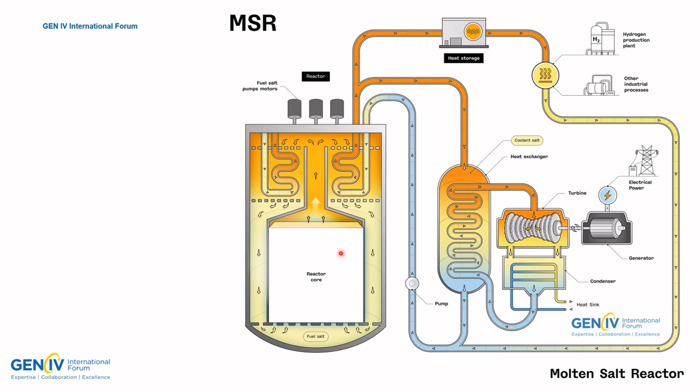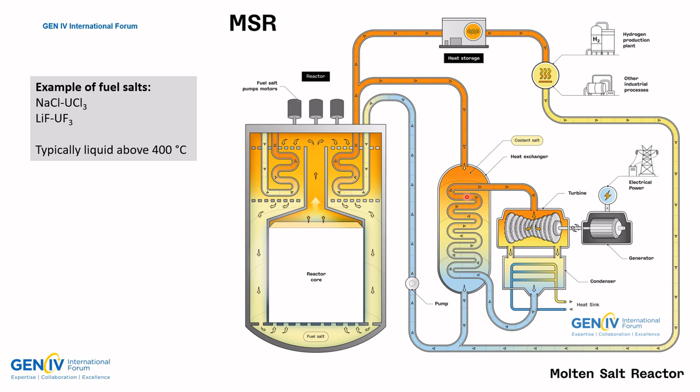My name is Mascaron. I'm a cyclist and a nuclear engineer, and I will pitch my Gen 4 PhD research carried out at CEA in France. I studied molten salt reactors, which are nuclear reactors with fuel in the form of a hot liquid, circulated from the core where fissions generate heat to heat exchangers. The heat is then carried by a coolant salt and used to generate electricity in a power conversion cycle.

This is the concept, but as with bicycles, we must figure out how to operate MSRs, a topic rarely covered in literature. In my PhD, I propose a methodology to define and assess strategies to control MSRs depending on their design. For instance, when to brake, how much, with what brake technology, and how do the answers to these questions depend on the bike design and on the road you follow.

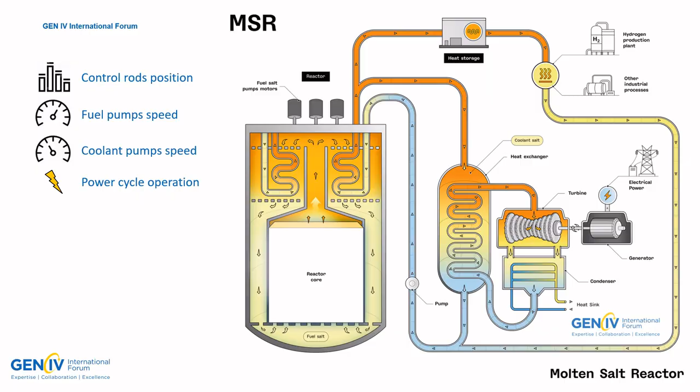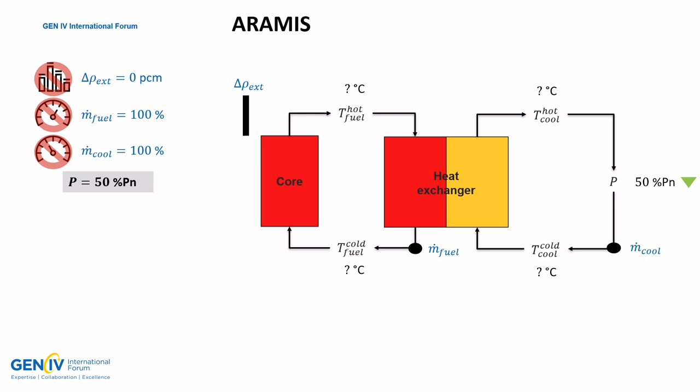Let's take Aramis, a chloride salt MSR at nominal power. Now, assume we want to operate at 50% power, without using control rods or adjusting pump speed. Applying a lumped parameter static model I developed, we obtain a new steady state. Globally, the temperature rose, except in the fuel hot leg.

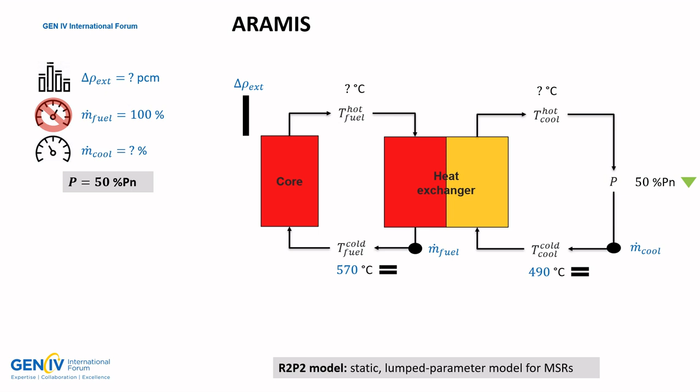Due to important temperature variations, I used my model the other way around. This time, I want the cold leg temperatures constant. To make it work, I must use control rods and adjust the coolant pump speed. More generally, we can compute the operating temperatures depending on power and the corresponding commands. These altogether define a control strategy.

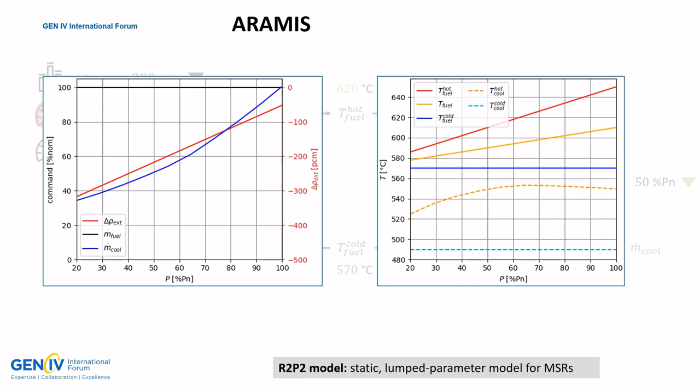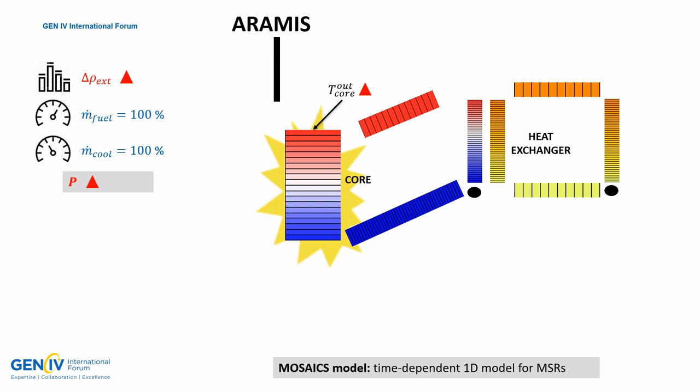And in case of an accident? I performed safety studies with a time-dependent, one-dimensional model I extended. For instance, in a reactivity insertion accident, the fuel temperature reaches a peak before stabilization thanks to reactivity feedbacks. With sensitivity analysis, I derived an analytical correlation to predict this peak value from reactor parameters and their operating conditions that depend on a control strategy.

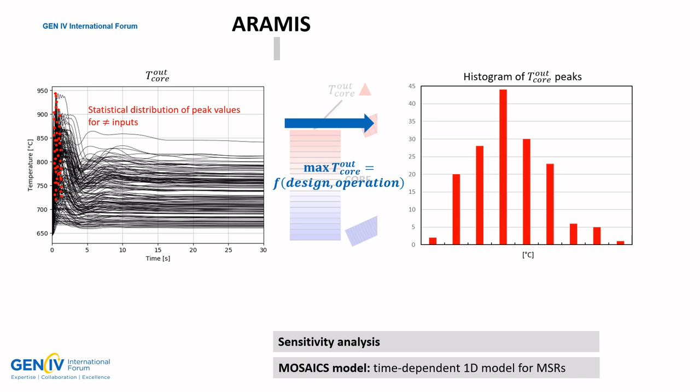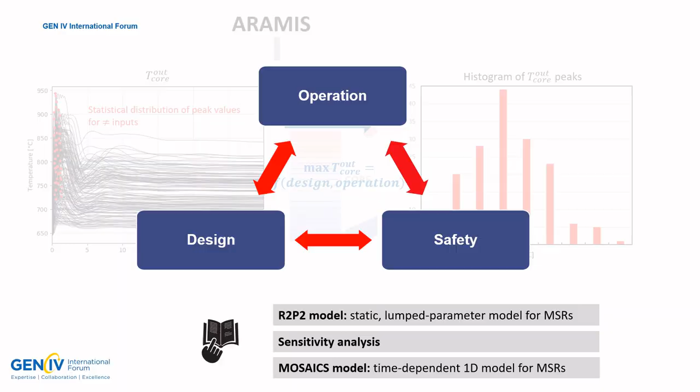In other words, I propose an approach to assess the safety of an MSR in various operating conditions and to improve it by adapting its design or the control strategy. Let's hope that my research will help MSR designers go in the right direction from the starting line. That's all for today.